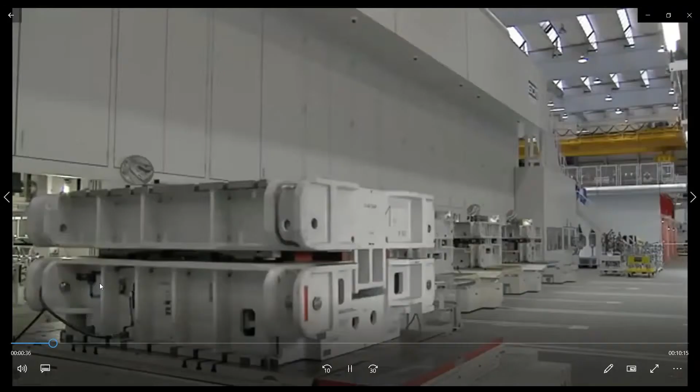Now you can see here how accurately the arms are going to be fitted into the nut bolt assembly at the bottom. You can see, and this plant is totally automatic with minimum human intervention.

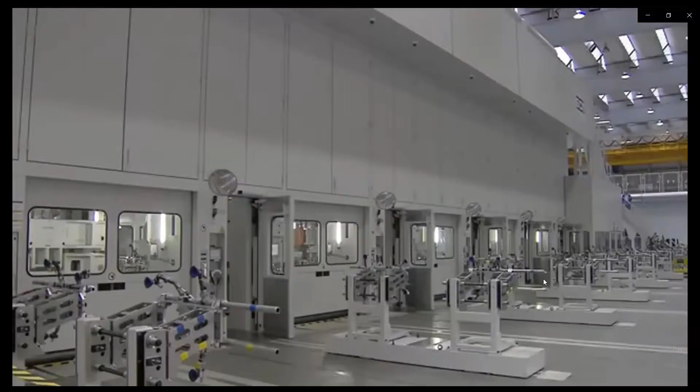Now see here, these are the robots that are working in this plant. Okay, and this robot, it can be 6 axis, 4 axis. This we will discuss later.

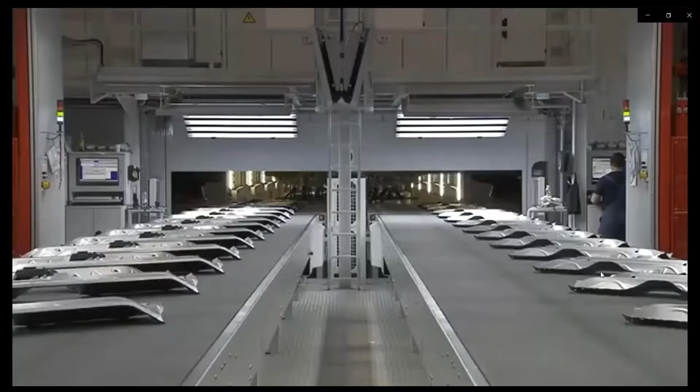Now here you can see, for this complete production line only one supervisor is there, and he is only managing the data, how much production is going on, whether the machines are working or not. Only the data is with this supervisor.

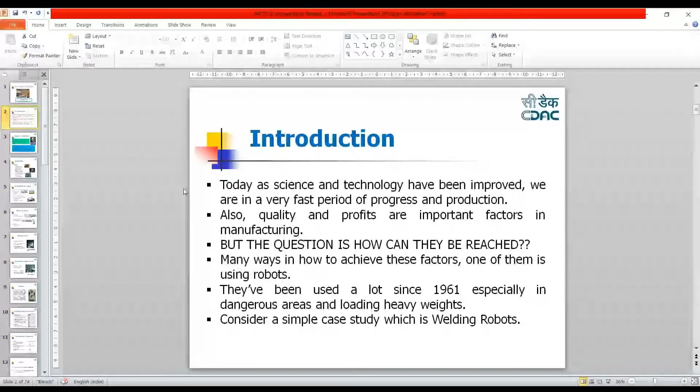Now we can see that people are interpreting robotics in many forms. Am I audible? Yes sir, yes sir. Now people are interpreting robotics in many forms.

Some people think that the robot, which is a human, is a robot. And some people think that the gadget which is doing your work, which makes your complicated work simple and helps you out, is a robot. It can be any. So there are different platforms to work on the robot, and it varies from application to application. And in this topic, we have specifically chosen the SCARA robot.

In the last, I will show you one more video, which is the setup that is here in our lab. And I would request all of you, after I complete my lecture, please stay connected for 5 minutes so that I can show you the facility and what kind of robot we have, so that you may get the industrial exposure.

It is not that we have very small tiny robots which you will connect and they start working. We have the industrial robot and the industrial automation system lab. So it's my request to all of you to please remain till the end.

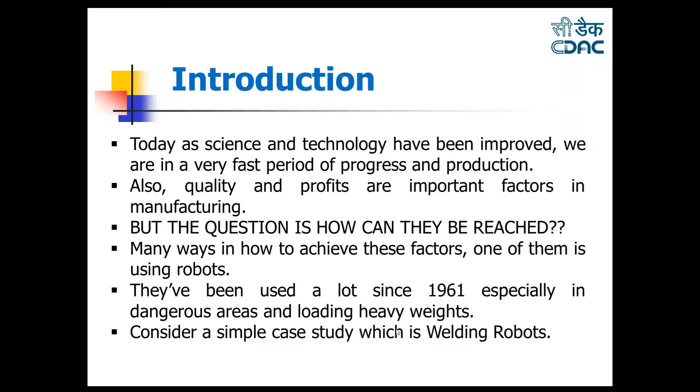So if I talk about the father of robotics, the word robot was coined by Czech novelist Karel Čapek in 1920, and robot in Czech is a word for worker or servant. That means the work for robotics started in 1920, and he might be lazy like me.

He thought, why not invent such a thing, such a gadget where it can simplify my working, it makes me always at rest. So a definition of robotics then came into existence: a robot is a reprogrammable multifunctional manipulator designed to move material, parts, tools, or specialized devices through variable programmed motions for the performance of a variety of tasks.

Motions for the performance of a variety of tasks - this is the definition taken in 1979 from the Robot Institute of America, which declared it.

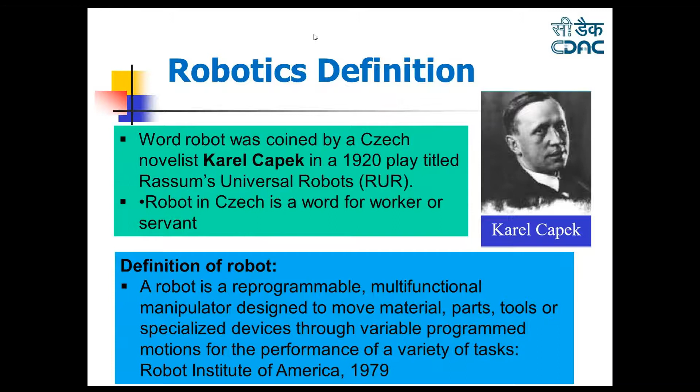Ideal tasks include dangerous work like space exploration, chemical spill cleanup, disarming bombs, disaster cleanup, boring bore wells, welding car frames, and part pick and place. We will take the example of part pick and place robots, high precision or high speed robots required today in surgery where the doctor is at a remote location.

What is the difference between automation and an automated robot? Automation is machinery designed to carry out a specific task - whether it's a bottling machine, dishwasher, or paint sprayer, it does only one task. These are always better than robots because they can be optimally designed for a particular task, so if designed for a particular task, their cost is much less.

Robots are machinery designed to carry out a variety of tasks. It can do pick and place - we have seen a pick and place robot punching holes into a PCB, and mobile robots are there, along with computer numerical control machines.

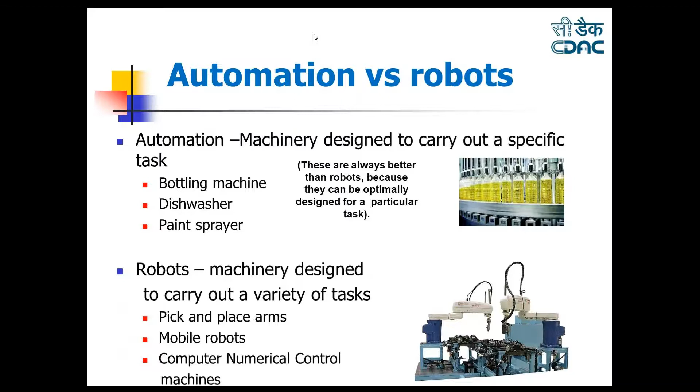Industrial robots can be divided either by applications or by their types. First and basic is the pick and place robot, where you can pick and place something. This pick and place robot is called a SCARA robot - selective compliant articulated robot arm. It is an arm, and you can see this is the SCARA robot.

It is a pick and place robot with angular XYZ positions. Its axes are maximum up to 4 axes, and its rotation is up to 4 axes.

Next is continuous path control, which moves along a programmable path. A 6 axis robot is there - 6 axis means it can move on its 6 axes.

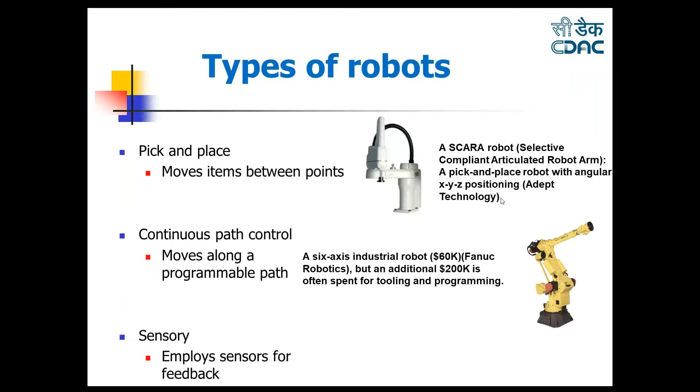There is some disturbance coming in between. Kindly mute your mics. Next is the sensory type, which employs sensors for feedback. Naturally, I think somebody is driving and also getting into our lecture. So please mute your mic.

First is the pick and place, which moves items from one point to another and does not follow a specific path between points. The most important thing is its path can be changed - by applying a PLC or its controller, you can change its path.

Its uses include loading and unloading machines, placing components on circuit boards. Whenever you see in a production plant, components are placed on PCBs based on the camera and vision system - the components are placed where an IC is going to be placed and soldered. It's also used for moving parts off conveyor belts.

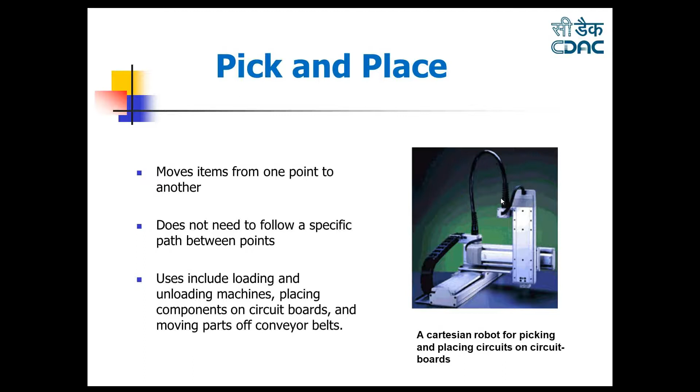A Cartesian robot is used for picking and placing circuits - this is the robot shown on the right side. Next is continuous path, which need not be explained again since you have already seen this robot.

The next most important thing your robot relies on is the sensory part, meaning the electronic circuitry. It uses sensors for feedback, and to control the robot's position you need sensors. Closed loop robots use sensors in conjunction with actuators to gain higher accuracy with servo motors.

Whenever you need higher accuracy, a servo motor is required. We have already discussed that when you give a command to a servo motor to move 10 meters, it will move only 10 meters, not even 10.01 meters.

Uses include mobile robotics, telepresence, search and rescue, and pick and place with machine vision. Whenever I talk about machine vision, it is related to the cameras being used.

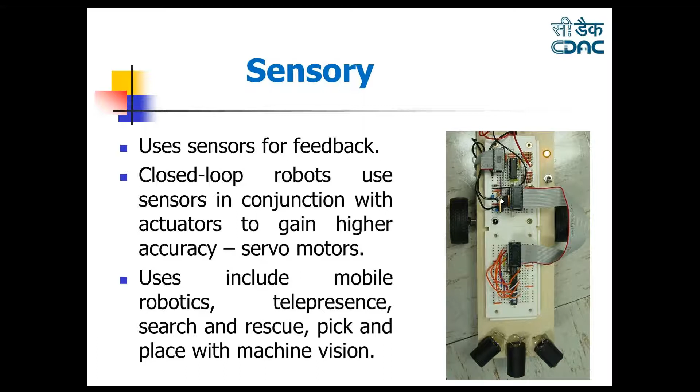Now, measures of performance - how you can measure the performance of a robot. First is the working volume, meaning the space within which the robot operates. Larger volume costs more but can increase the capability of a robot. Very true. Speed and acceleration - the higher the speed, the more work being done by the robot.

Resolution - how accurate is it? What is the smallest step size that your stepper motor can take so that it can pick very tiny things, or move at very sharp edges.

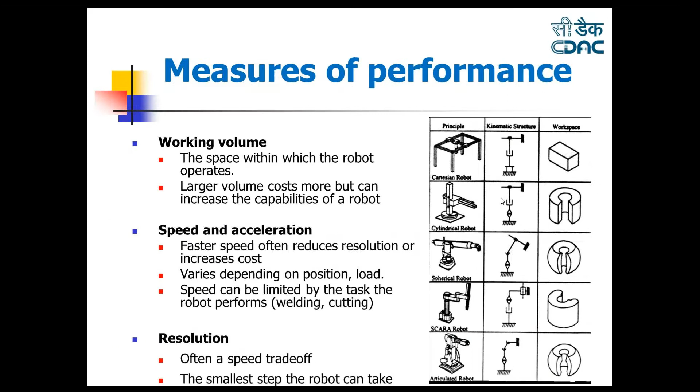Accuracy - suppose I have to drop something at x and y coordinates and it drops at x1 plus and y1 coordinates instead, then it is not acceptable.

Repeatability - will the robot always return to the same point under the same control conditions? Sometimes there is a gear ratio between your motors. Based on the gear ratio, your robot has to be inclined at that position. If the proper gear ratio of servo motors is not selected, there will definitely be a problem in your robot - you will never achieve the accuracy. And higher the accuracy, higher will be the cost, because more precision means more gear ratio is selected in the motors.

Now control can be open loop or closed loop. Open loop is where there is no feedback - your robot is going on and whatever position you give, it goes. In closed loop, it takes input from a vision system. It can be used in a pick and place system where the vision system is used.

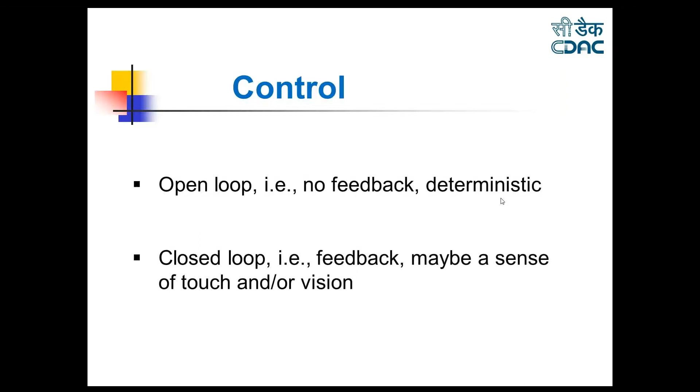Next is kinematics and dynamics. I won't go into the detail of kinematics and dynamics. I just want to tell you that these are the things responsible for choosing the exact path of your robot, at which angle your robot should rotate, and in the arm how many degrees of rotation there are.

Suppose it is a human arm - I can rotate right from the shoulder. I have rotation at the shoulder, rotation at my wrist, rotation in my fingers, rotation in my hand. This is kinematics and dynamics, and based on this, you can choose the rotation and decide the path of your robot.

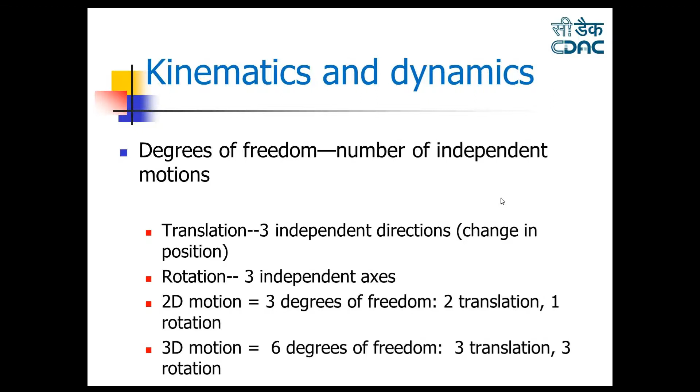This is again a very big topic, kinematics and dynamics - much more mathematics is involved.

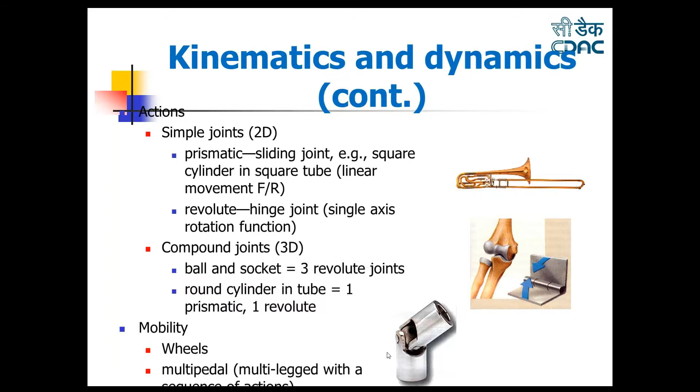And next is mobility, where a socket is there and this socket can rotate in between. These are the joints we generally use for robotics.

Working areas can be rectangular where the xyz axis is there, sometimes cylindrical where some theta angle is there, and it has to rotate on its own axis. There are some coordinates which it has to follow as a path.

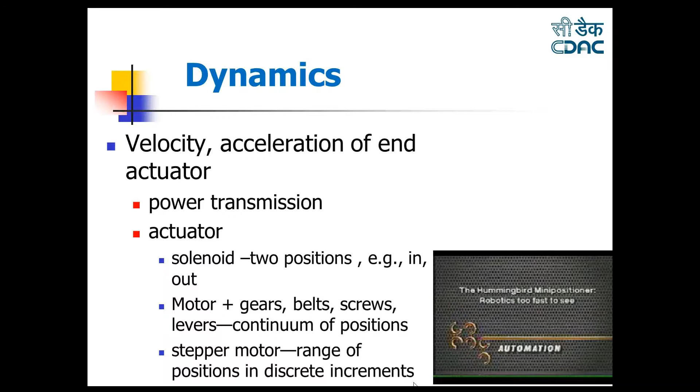Dynamics relates to the velocity, the acceleration of the end actuator. End actuator is basically the gripper which has to either pick the object or rotate the object - that is your dynamics.

Now the problems which are always related to robotics - I already discussed joint play. It is just like a human body - with age our joints have, you can say, a deterioration problem, either at the knees. Same is with the robot.

Accelerating masses produce vibration, elastic deformations. Whenever the speed of the robot is very high, it produces very high vibrations, and sometimes it breaks the platform. So you have to keep this thing in mind.

And the third thing is torques. Stress is transmitted depending on the end actuator and the loads.

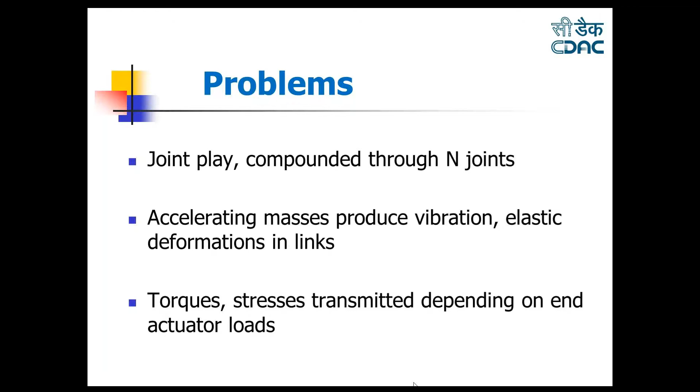And next is the position of the end actuator. It always matters whenever you have to pick the device, whenever you have to place the device - what should be its position, how is it going to pick the device, whether it is like a hand, whether you are giving a compressor so that it can suck and make a vacuum, and the trajectory of the end actuator - what path it follows.

These are the control and programming parts, and next is the feedback control.

Now whether your actuator is going in the right direction or not depends upon the feedback control. And for feedback we are generally using rotation encoders, cameras, pressure sensors, temperature sensors, limit switches, optical sensors, and sonars.

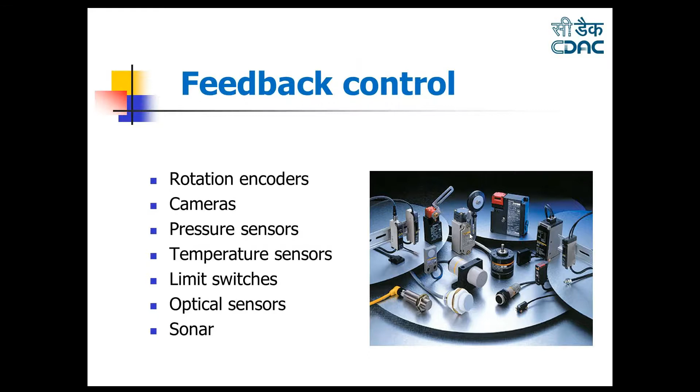Okay, so the software platforms for robotics can be a package which simplifies our work. It's a unified programming environment. It has a unified service execution environment, a set of reusable components, and a debugging and simulation environment. Because you can't buy a robot, you must have a simulator which can debug your program, and a package of drivers for the most widespread robotics hardware. It must have a package of common facilities such as computer vision, navigation, or robotic arm control.

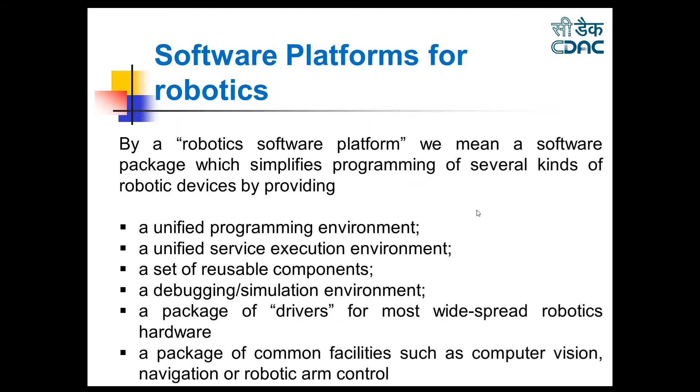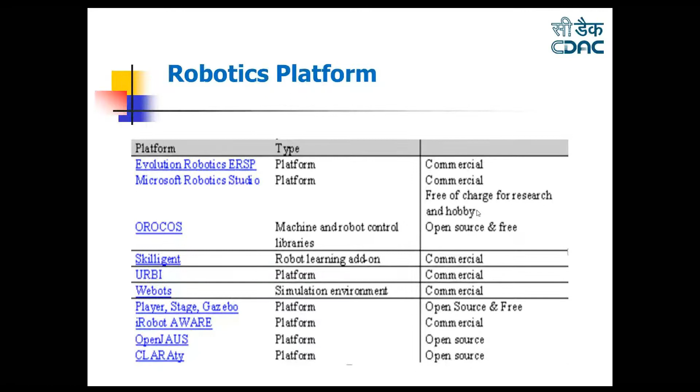And these are the robotic platforms that are available right now; some are free, some are commercial. And this is the free version, which is from the Microsoft Robotics Studio. It is available, and it is more or less not an industrial kind of robot. It is used for very small robots. And this is all about the robots from my side. Now I will move to the software part.

I have a software that is RT Toolbox 3. This is used for SCARA robots, and it is for the Mitsubishi SCARA robot. I am sharing the screen. Is this screen visible to everybody? Yes, sir. See here, this is the RT Toolbox 3 robotic software. It's a free software. You can get it online.

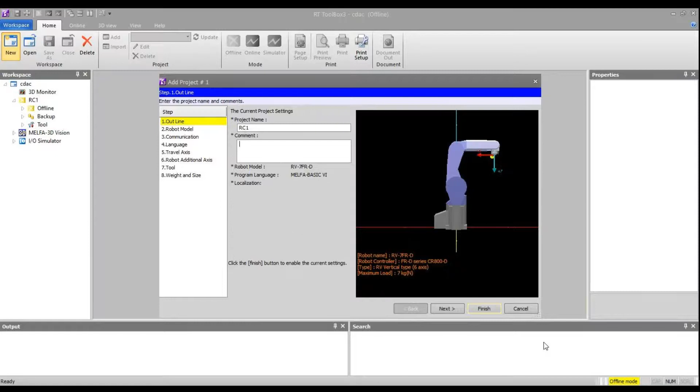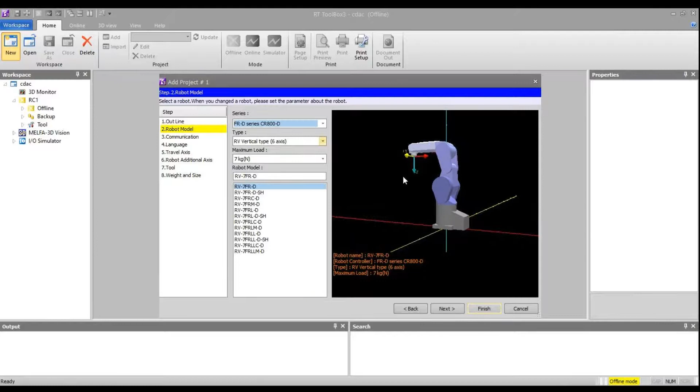Now here from next I have to take the series. One is the FR-D series, another one is the RV series, and there are many series here. We have taken this series. Now this is the 6-axis SCARA robot. You can see this is the 6-axis: 1, 2, 3, 4, 5, and 6 is its gripper.

And I have taken the vertical type. I can take the horizontal type robot also, but here I am taking the vertical 6-axis. The maximum payload it can take is 7 kg. I have chosen this robot model, and again I am going to next. In automation every device has an IP address, so here I am giving the IP 0.20, subnet mask, everything.

Now the programming language that is used for this robot is MELFA-BASIC VI. Please keep in mind, MELFA-BASIC VI. And the regional language can be any language, but I am taking the language of the operating system. English is our language, the internationally recognized language I am taking.

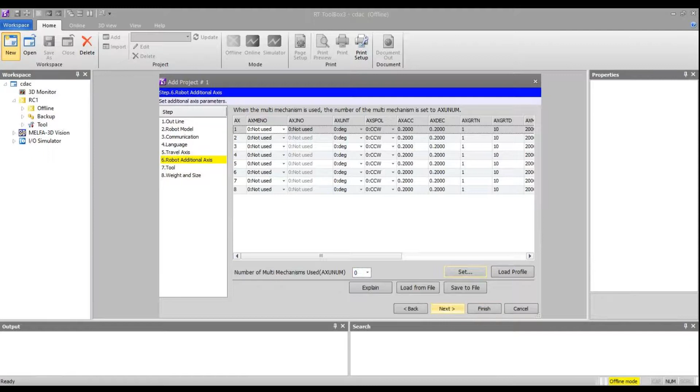Now the travel axis: if I have to travel my robot an extra mile, then I can use the travel axis. I am not using it here. Robot additional axis: suppose I have to add more axes to my robot, make it 10 axis or 12 axis, then I can use it, but I am not using it here. It will complicate the system. Now it is tool, weight, and next, I have finished.

Now it will ask whether you want to change the operation mode to online or simulation. When it is online, I have to connect to my robot, and when it is simulation, I will do the simulation. I will show you the simulation part, but I am not able to fully do the simulation because there is some issue. I will make the program and then show you the actual robot which is programmed. I have the video for that.

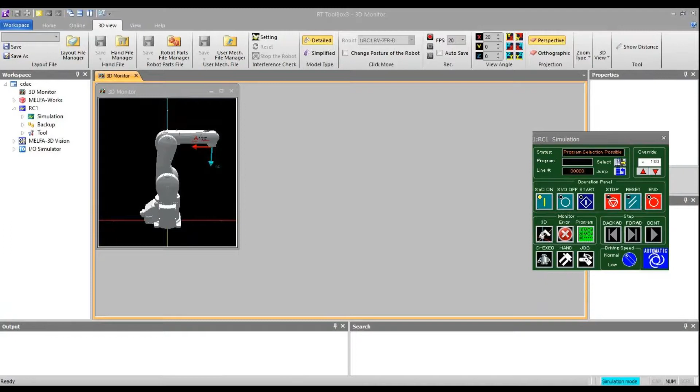I think you all are able to see the robot and a green color screen on the right side. Is it visible to all of you? Vijay sir? Yes, sir. Okay. Now you can see this is my robot. I can rotate it like this. Can you see the rotation of the robot? This is a 3D view which I am showing to you. Yes, sir. Okay.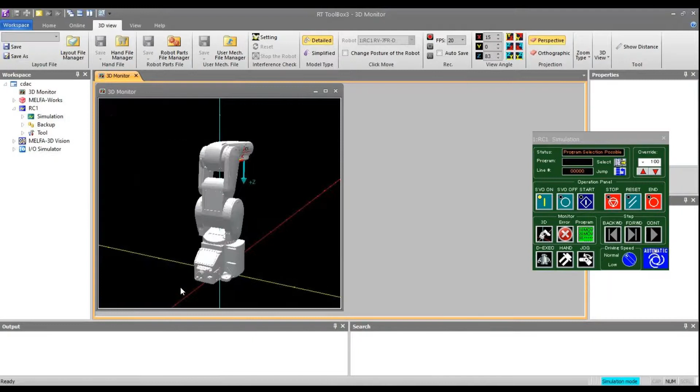Now I go to jog mode. Here in jog mode, if I have to change the individual position, I will show you the axis. You can see this is J1, jog 1. This is the first axis. Can you see how it is rotating?

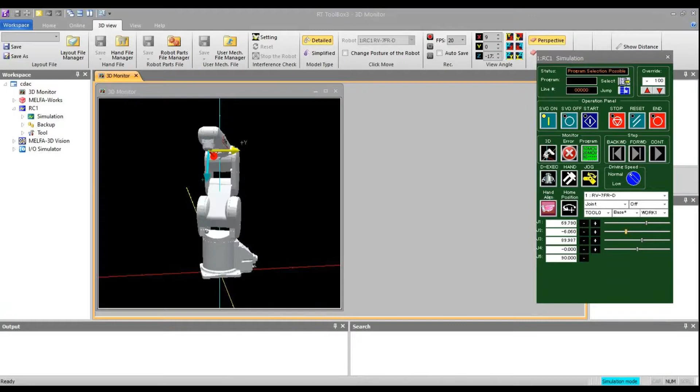Tell me, please reply. Can you see this? This is J2. Yes, sir. Yes, sir. This is J2.

Okay. Here it is J3, J4. See the x-axis, y-axis, how is it rotating? Here it is J5. Here it is J6. This is a 6-axis robot. Okay.

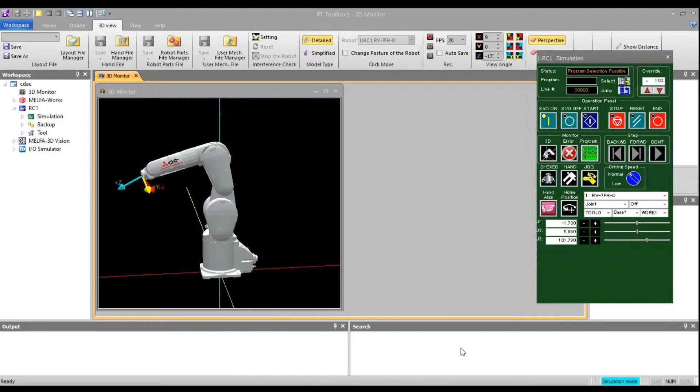Now, if I have to do the program, I will go to simulation. I will click program. I will write it as M1. Okay. Now this programming window appears. Here I will use very basic 2 or 3 commands.

Suppose now servo motors are used here. If I have to switch on the servo motor, I will use the command servo on. Okay. Next, if I have to move it at position P0, move P0. Okay. Then if I have to give the delay, DLY 1 means 1 second. Another position is move P1 and servo off. Okay.

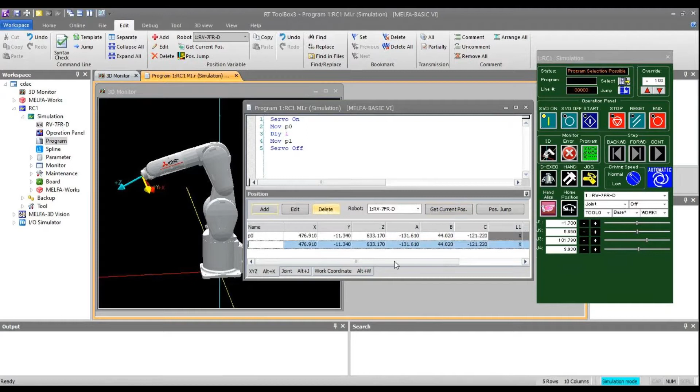Now how will I give the robot the coordinates or the axis of P0 and P1? P0 and P1 are the positions. I will go to add. This is my home position. I will write here as P0. Get current position. Again add. Next is add P1, again get current position. Okay, I will save it.

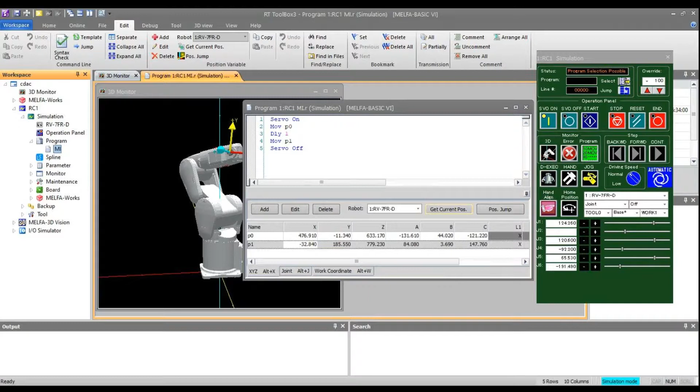Okay, now you can see the program, it is coming here as M1. Is it clear? So this is the program, and right now I have some simulation problem. I will switch to the video where our original robot is. I am showing you the original robot. Okay.

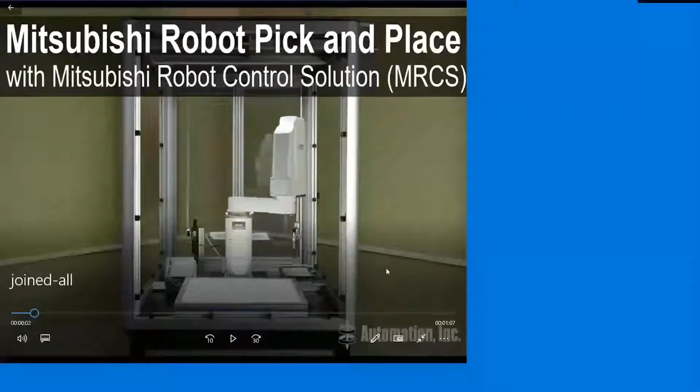Okay, sir. Just wait. Just wait. Just wait. I have lost my video. Please wait. I am searching for it. I got the video. I am sharing. Please bear. Can you see this video? Can you see this image? Mitsubishi robot pick and place. Yes, sir, it is visible.

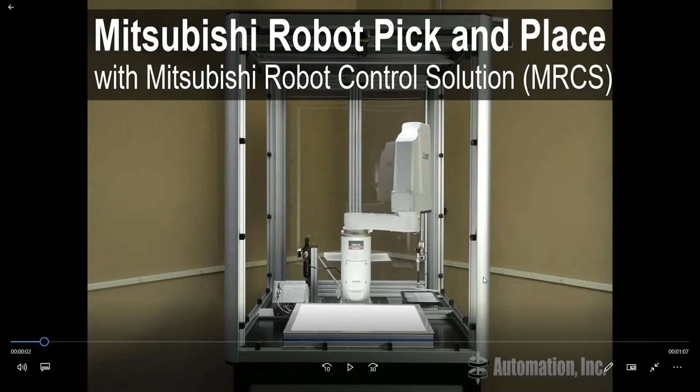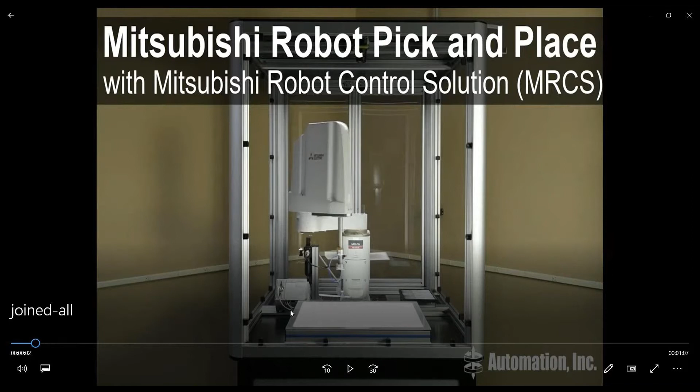I think the video is over. Here I want to tell you that this is the Mitsubishi robot. Now suppose this robot is at this position. Now here the gripper is there. This gripper is used to pick the knives, and here you can see a sort of flexible tubing is coming. A compressor is used which creates the vacuum and sucks the knife or any object to pick it.

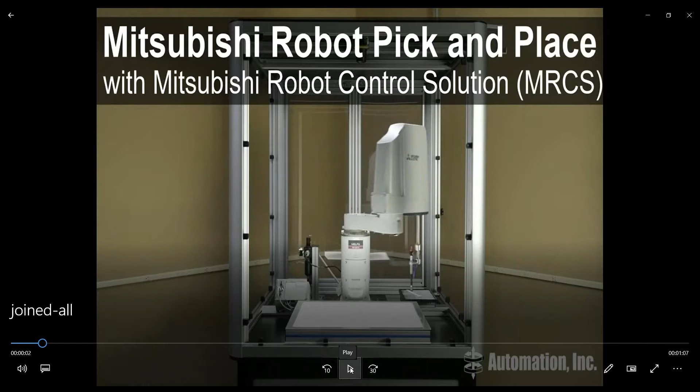Now how is it doing? It sucks the knife, the object, and we have fed it the coordinates x, y and z axis. All these coordinates have been given, and the orientation theta is also given at which position it is going to place the knife. And now you can see exactly it is picking from the position and placing. It means that the servo motors are so accurate that there is not a 0.001% chance of any error.

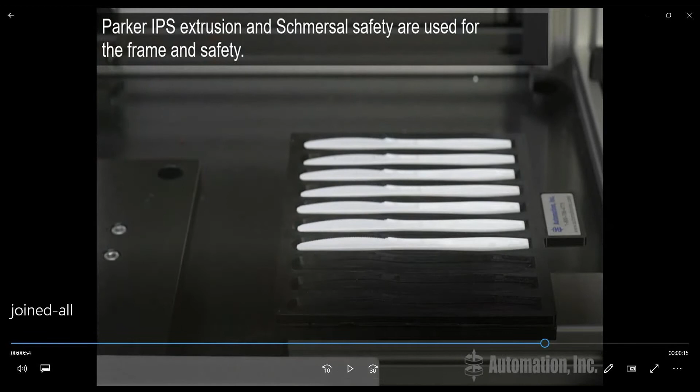Now you can see how it is picking the knives from a particular location. Not even 0.1 mm is it deviating from its position. This was the robot in our laboratory, and one picture I also want to share with you people. Please stay.